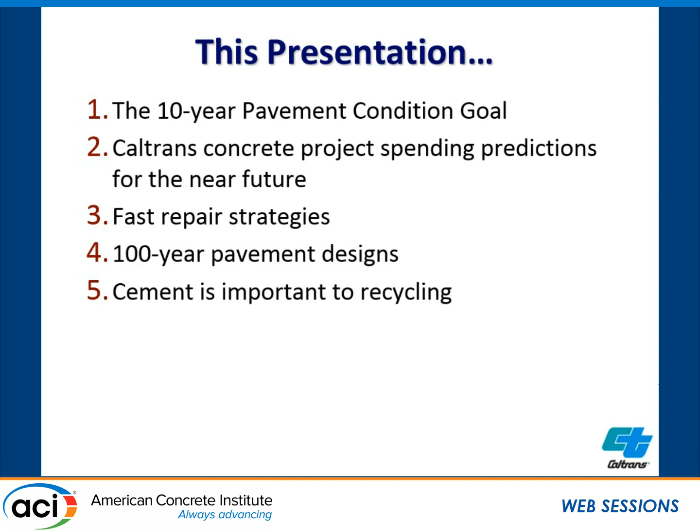I'm going to talk a little bit about a couple of fast strategies, about 100-year pavement design, something we've been working on in the department since I was in the Concrete Branch a few years ago. I'll also talk about recycling and some other things going on, so hopefully those of you in the industry will see where we're going to be spending money. I'll show you some of the strategies, just a couple of them. There are a lot of new ones out there, but I wanted to show you some with pictures, without going through all the formulas and equations.

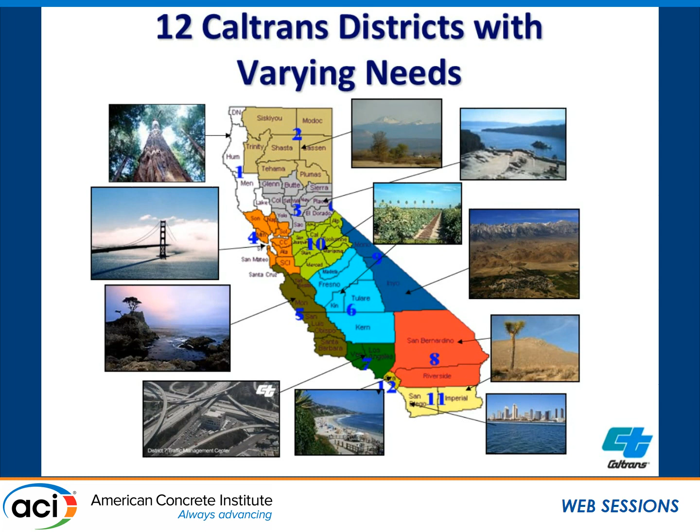For those not familiar with California, one of the cool things about our state is we have rainforest all the way out to desert. We have such a differing climate zone from end to end, north to south, east to west. It's an amazing place to work and live. It's also extremely challenging in terms of our pavement requirements.

As I was mentioning, I'm not going to read all of the slides, but some of them I might. Right now, our goal is to get to what we'd call an 80-10-10: 80% good pavement, 10% fair, and 10% poor.

That is our goal, and getting there will leave us in a place in 10 years where 10% seems like a lot, or 5,000 miles seems like a lot. But when we get to that point, it's going to be little pieces of pavement spread around that are very hard to get to. We're going to have corridors that are repaired, and major sections of the major highways that are fixed.

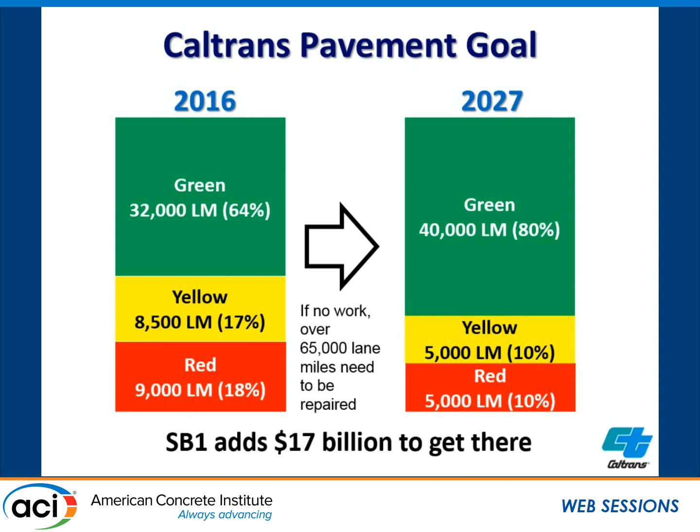And then we're going to be able to go in and fix small pieces as we need to. So SB1 is a bill that's coming - our gas taxes are going to go up soon. But we are going to be programming, in terms of Caltrans, another $17 billion worth of work. For those of you who are contractors, I'm going to give you a clue as to where that work's coming. So let me get into that - the big goal.

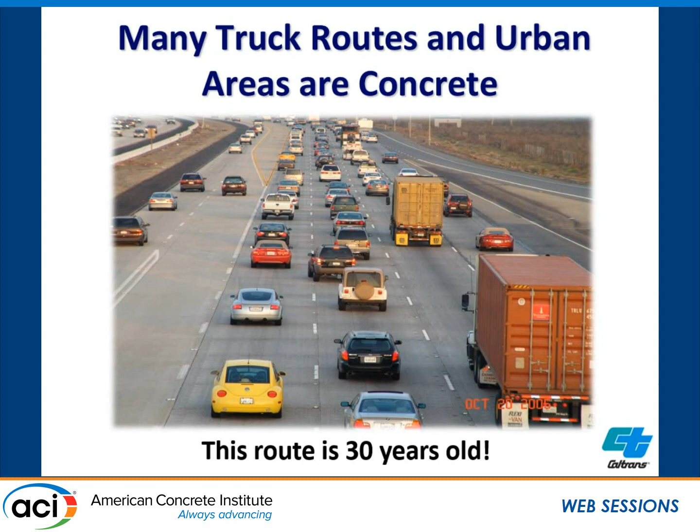Many of our routes - let me give you a flavor for California. Here's a route: most of our routes that have trucks on them, or in the urban areas, are concrete. When we break down those urban areas, 70% of them are concrete. One of the interesting things to me about that concrete, originally designed, was that almost 75% of it was built in the 60s and early 70s.

It was built with a 20-year design life. Most of it is still there - about 60% of it. We have gotten out of those early designs more than twice the design life we ever thought we would. Concrete pavement is holding up for us, unbelievably.

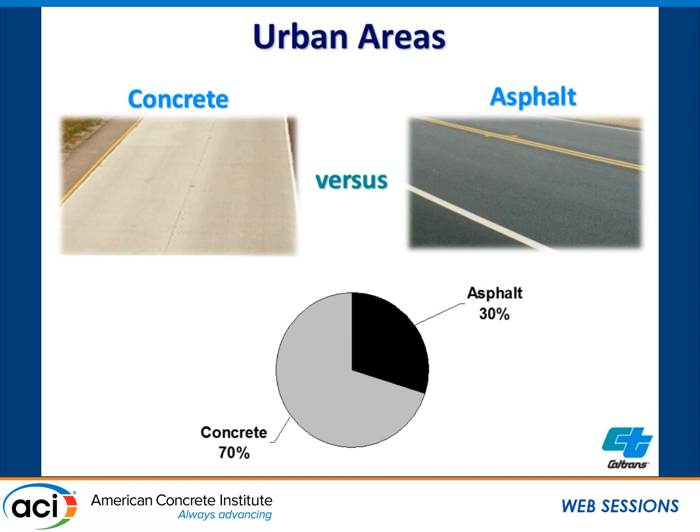And you know what? I'm going to tell you one of the secrets to it. If you ever look at concrete pavement in any other state, we did one thing - because we didn't have steel during various war efforts, we placed a lean concrete base underneath our pavements. It was like a 5-sack mix, and those mixes have held up famously for us in terms of being able to carry more loads than we ever would have expected.

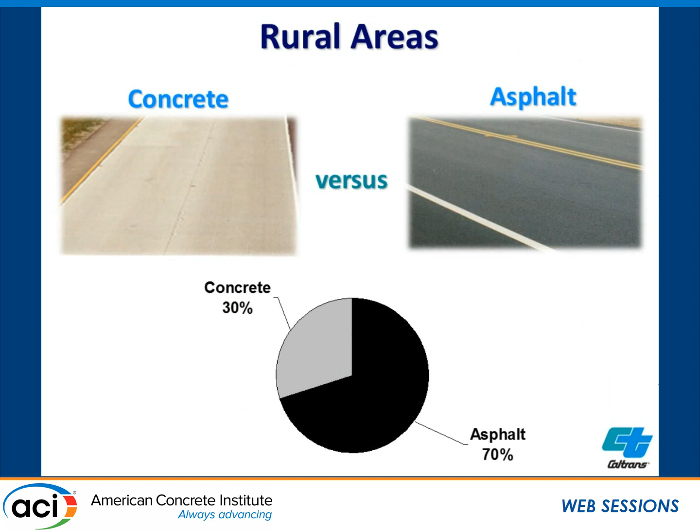Most of our rural roads are asphalt in California. Our roads in those rural areas are predominantly asphalt - only about 30% of them is concrete.

I noticed something as I was going through and looking at what our spending is. This is my job, my role right now - we're looking at programming out for 10 years. But what do we have coming for the next 3 to 4 to 5 years? One interesting thing in terms of asphalt and concrete pavement is when you look at how much they're spending.

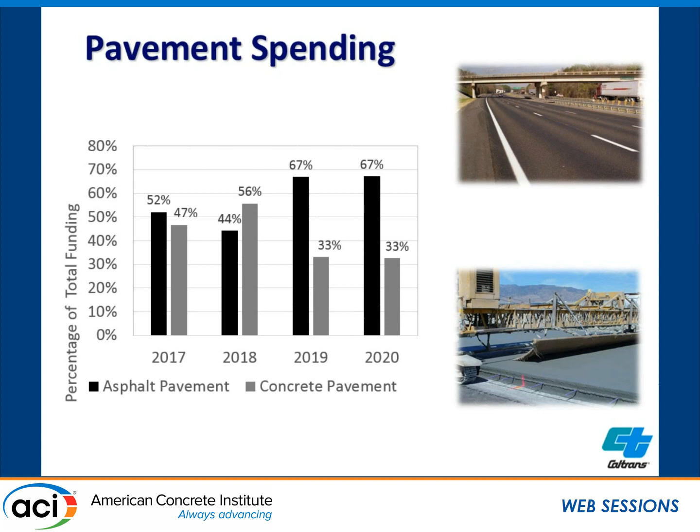While most of our roads might be asphalt, as I was trying to show you, the amount of money we're spending on concrete is significant. In fact, if you look on this particular chart, in terms of the dollars we're spending between asphalt and concrete, about 47% of it - or about half - is being spent on concrete.

We've got 2 of those projects coming, and we're pretty excited about them. Caltrans, we are as conservative as you're going to find as an organization. We innovate, but sometimes it takes us 40 years to look at a strategy to make sure it's really going to work, and I'll show you an example of that.

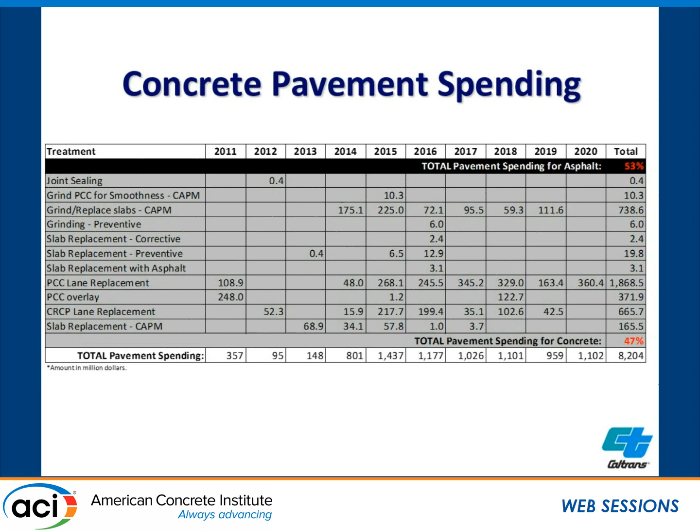What I don't show you here is that on October 22nd, we're going to be programming another $3.7 billion worth of work on top of this over the next 5 years. The amount of work that Caltrans has coming is phenomenal.

So now I want to get into a few strategies, and I'm going to talk about 3 of them. One of them is not exactly a concrete, but a cement strategy, for those of you who think about cement more than concrete. This is called cold foam.

It's a deep recycling strategy. This is where we go into an asphalt road, grind it up down to the base, with hot oil, water, and a little bit of cement put into it. Over the years, Caltrans has gone in time after time, ground it off, replaced it - we have this many needs, we have this much money, what are we going to do about that?

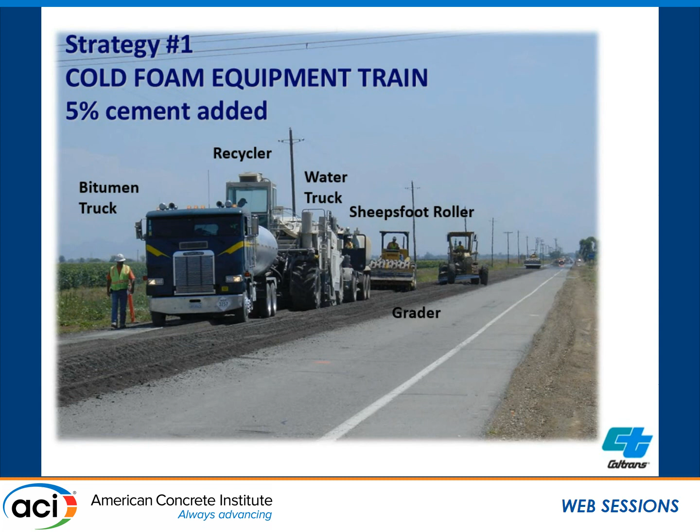Now we are looking to come in and recycle our roads. We're looking at those little asphalt roads, 1 lane in each direction, 2-lane highways. Caltrans' goal is about 15,000 lane miles of these, what we call Class 3 roads. Our goal is to go in on those roads, grind them up, rebuild them, recycle them, and then leave another layer of asphalt on top.

And on these, I'm going to show you a few pictures of this. Here's how it works: the grinder goes through.

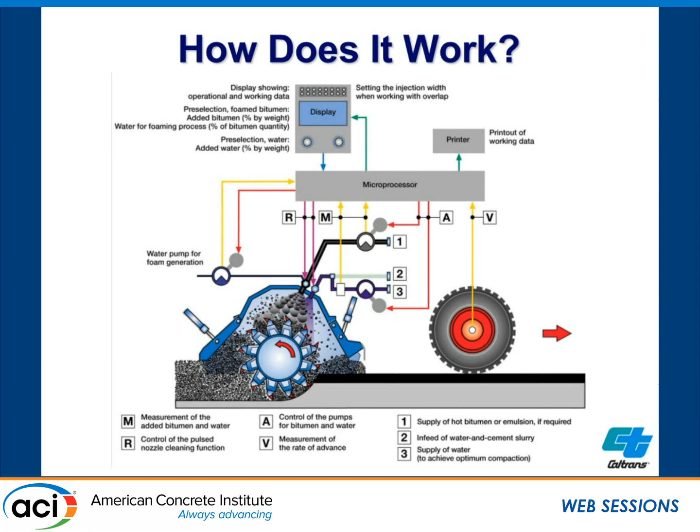You know what? Am I the only one who - you're cooking bacon, trying to teach your kids lessons or whatever, and you get a little water on your hands and throw that into the pan frying the oil, just to have a little fun and watch it splatter a little bit. That's what's happening in this recycling drum - cold water, hot oil being atomized in there, with a little bit of cement placed in at the same time.

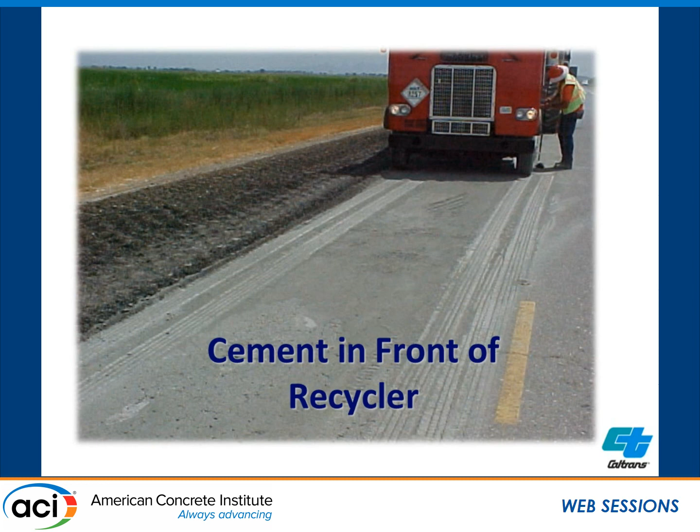Here's the grinding wheel. In front of the whole operation, we place 5% cement in terms of the volume we're working with, and this is what's coming out the back end - just a recycled layer that can then be worked through.

We found, in terms of lessons learned, we've studied this. We did the first one of these, and we've been studying it for probably about 15, 16 years now, and it is a strategy we are in fact going to be doing a lot of.

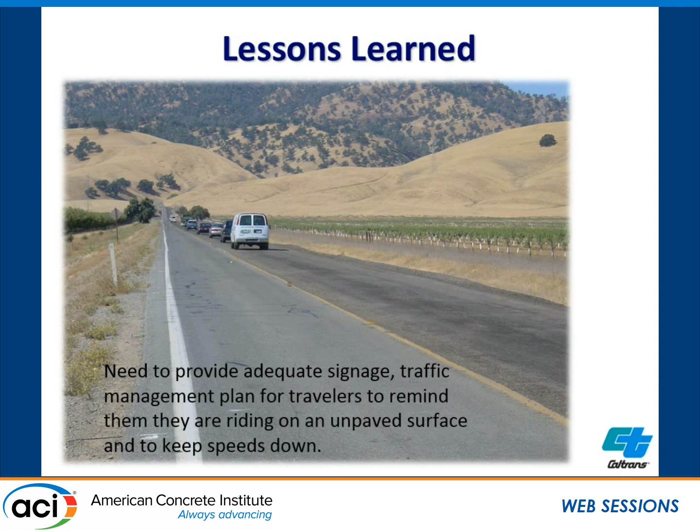I'll be happy to answer any questions about that, but I just wanted to share with you - if you're on the cement side, the paving side, or you want to see what's coming up new and have some of these Class 3 roads, this is where Caltrans is really going to be focusing.

The second one I wanted to share with you was a fast turnaround where we have to get in and replace slabs. If you're here in Southern California, you know the 10 - you have 300,000 cars per day, you have to go in with very small construction windows, where we can close that lane off at 9 or 10.